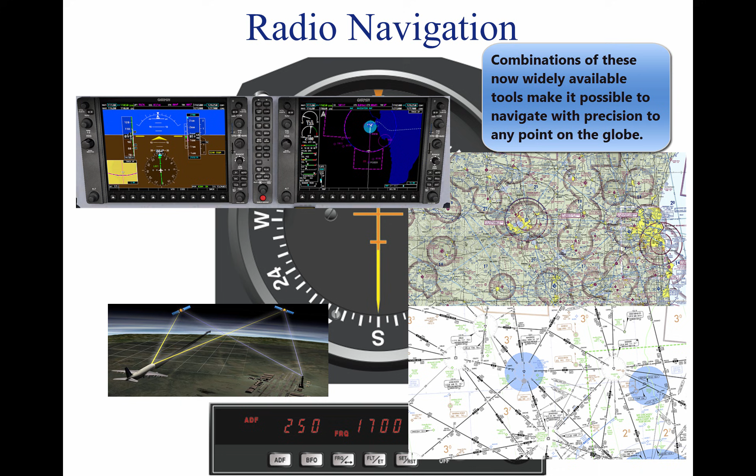Radio navigation. Advances in navigational radio receivers installed in aircraft, the development of aeronautical charts which show the exact location of ground transmitting stations and their frequencies, along with refined flight deck instrumentation, make it possible for pilots to navigate with precision to almost any point desired.

Although precision in navigation is obtainable through the proper use of this equipment, beginning pilots should use this equipment to supplement navigation by visual reference to the ground, pilotage. This method provides the pilot with an effective safeguard against disorientation in the event of radio malfunction.

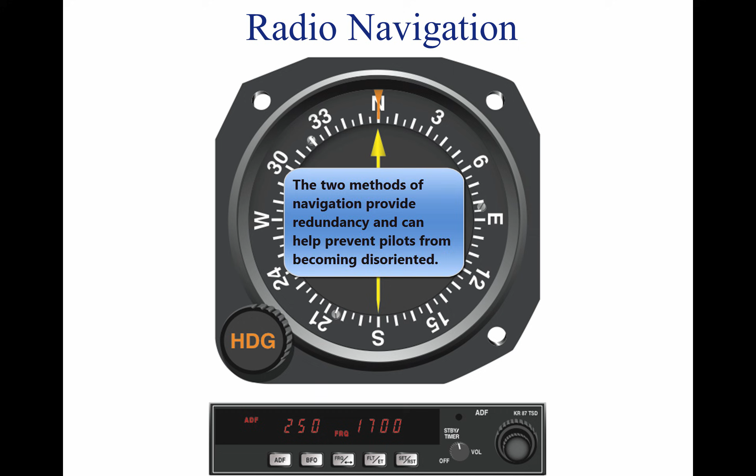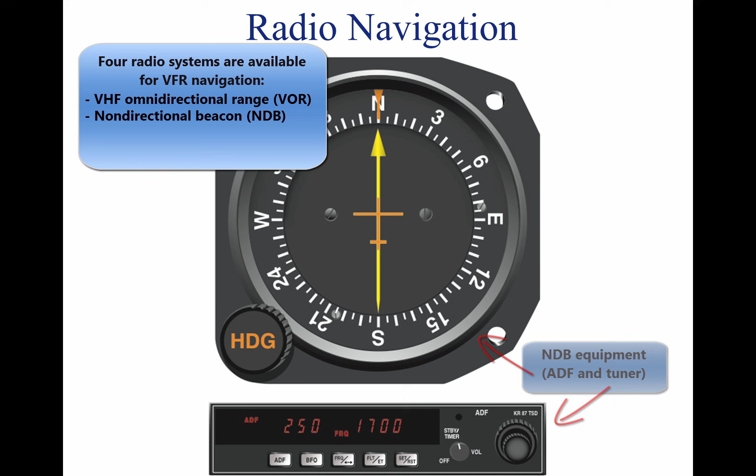There are 4 radio navigation systems available for use for VFR navigation. These are VHF Omnidirectional Range (VOR), Non-Directional Radio Beacon (NDB), Long Range Navigation (LORAN-C), and Global Positioning System (GPS).

Very High Frequency, VHF Omnidirectional Range, VOR. The VOR system is present in 3 slightly different navigation aids, nav aids: VOR, VOR DME, and VORTAC.

By itself, it is known as a VOR, and it provides magnetic bearing information to and from the station. When DME is also installed with a VOR, the nav aid is referred to as a VOR DME. When military tactical air navigation (TACAN) equipment is installed with a VOR, the nav aid is known as a VORTAC. DME is always an integral part of a VORTAC.

Regardless of the type of nav aid utilized, VOR, VOR DME, or VORTAC, the VOR indicator behaves the same. Unless otherwise noted, in this section, VOR, VOR DME, and VORTAC nav aids are all referred to hereafter as VORs.

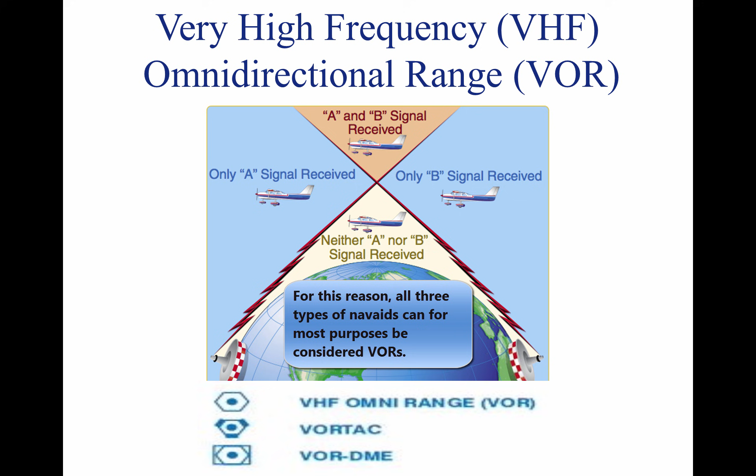The prefix omni means all, and an omnidirectional range is a VHF radio transmitting ground station that projects straight-line courses, or radials, from the station in all directions. From a top view, it can be visualized as being similar to the spokes from the hub of a wheel.

The distance VOR radials are projected depends upon the power output of the transmitter. The course or radials projected from the station are referenced to magnetic north. Therefore, a radial is defined as a line of magnetic bearing extending outward from the VOR station.

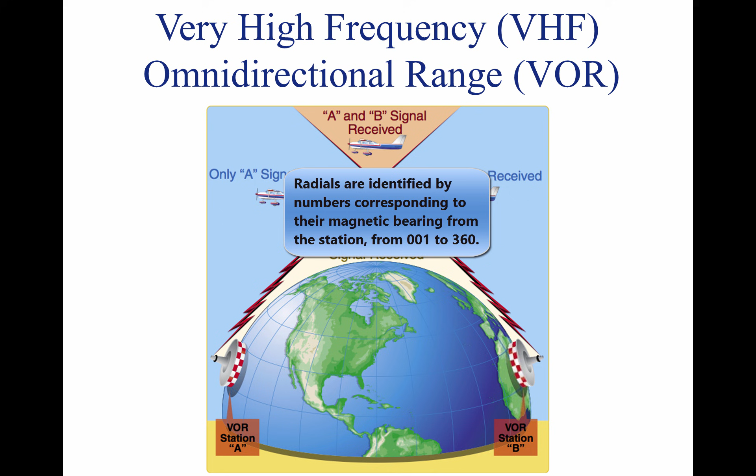Radials are identified by numbers beginning with 001, which is 1 degree east of magnetic north, and progress in sequence through all the degrees of a circle until reaching 360 degrees. To aid in orientation, a compass rose reference to magnetic north is superimposed on aeronautical charts at the station location.

VOR ground stations transmit within a VHF frequency band of 108.0 to 117.95 MHz. Because the equipment is VHF, the signals transmitted are subject to line-of-sight restrictions. Therefore, its range varies in direct proportion to the altitude of receiving equipment.

Generally, the reception range of the signals at an altitude of 1,000 feet above ground level (AGL) is about 40 to 45 miles. This distance increases with altitude.

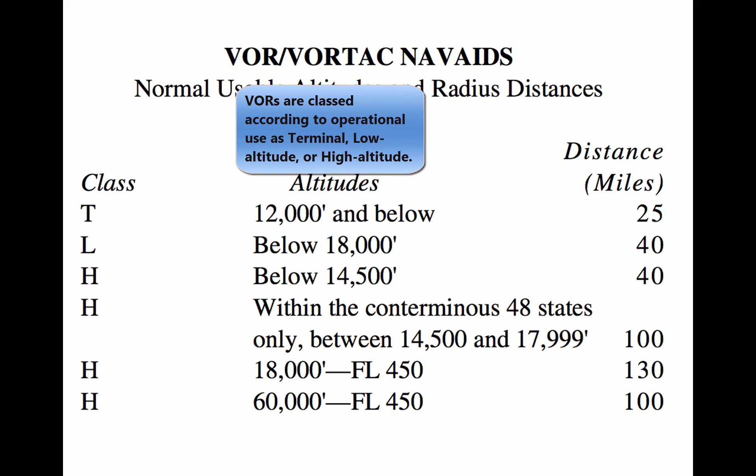VORs and VORTACs are classed according to operational use. There are 3 classes: T, terminal; L, low altitude; and H, high altitude. The normal useful range for the various classes is shown in this table.

The useful range of certain facilities may be less than 50 miles. For further information concerning these restrictions, refer to the Communication Nav Aid remarks in the AFD.

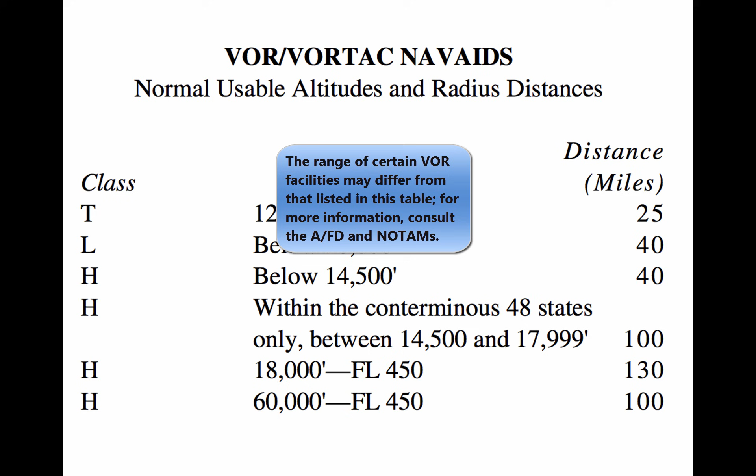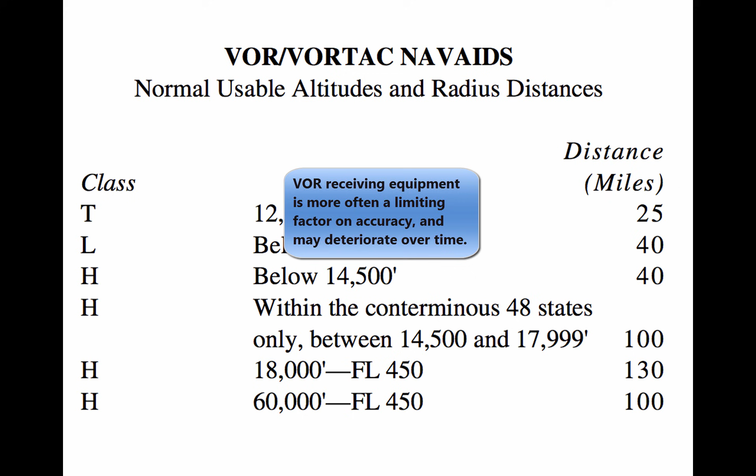The accuracy of course alignment of VOR radials is considered to be excellent. It is generally within plus or minus 1 degree. However, certain parts of the VOR receiver equipment deteriorate, and this affects its accuracy. This is particularly true at great distances from the VOR station.

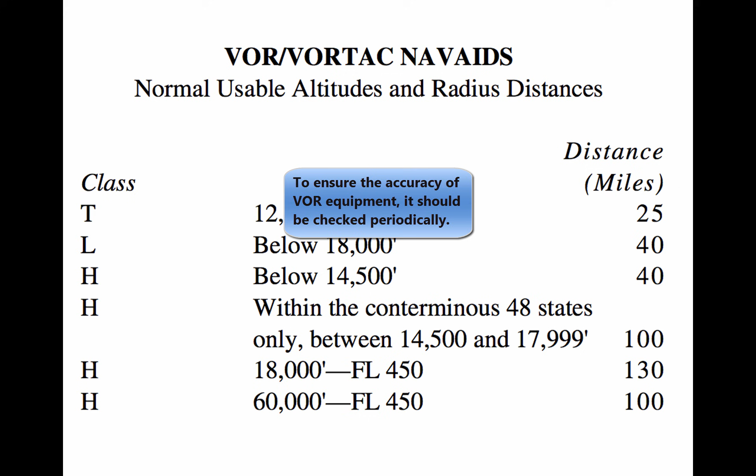The best assurance of maintaining an accurate VOR receiver is periodic checks and calibrations. VOR accuracy checks are not a regulatory requirement for VFR flight. However, to assure accuracy of the equipment, these checks should be accomplished quite frequently and a complete calibration each year.

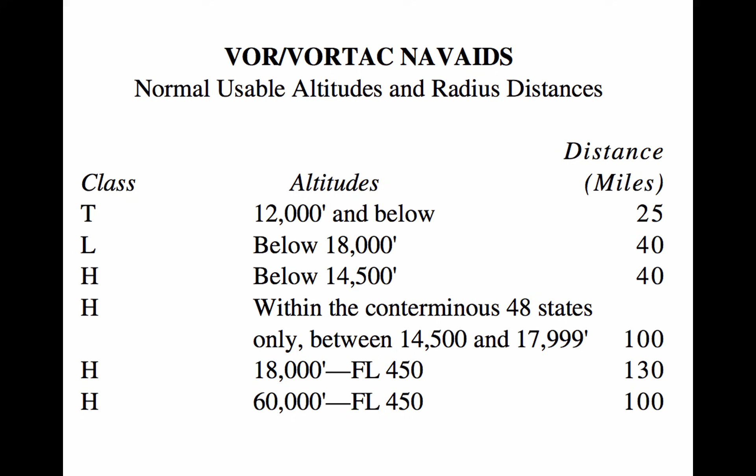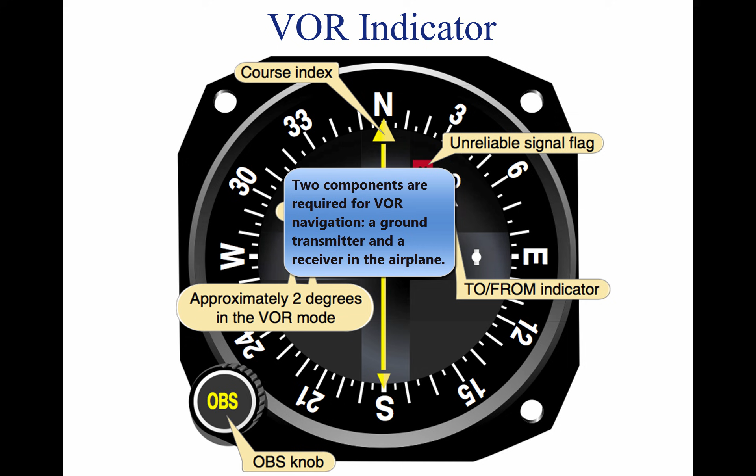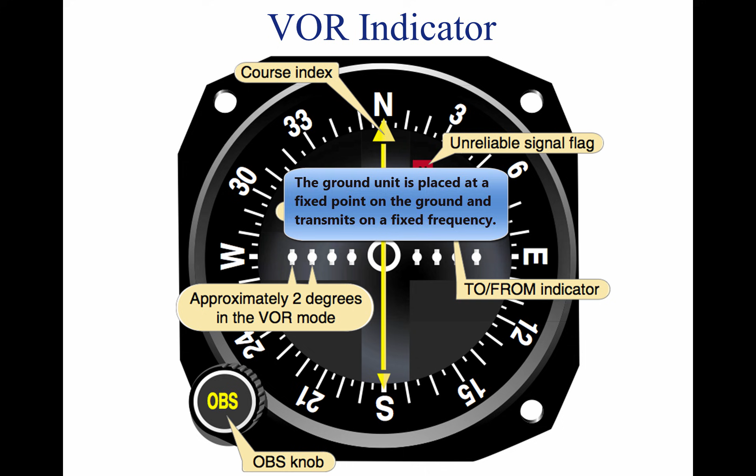Using the VOR. In review, for VOR radio navigation, there are two components required: ground transmitter and aircraft receiving equipment. The ground transmitter is located at a specific position on the ground and transmits on an assigned frequency. The aircraft equipment includes a receiver with a tuning device and a VOR or omni-navigation instrument.

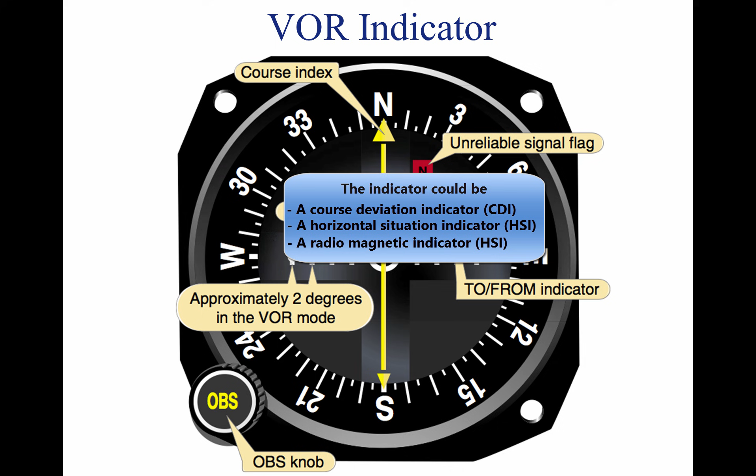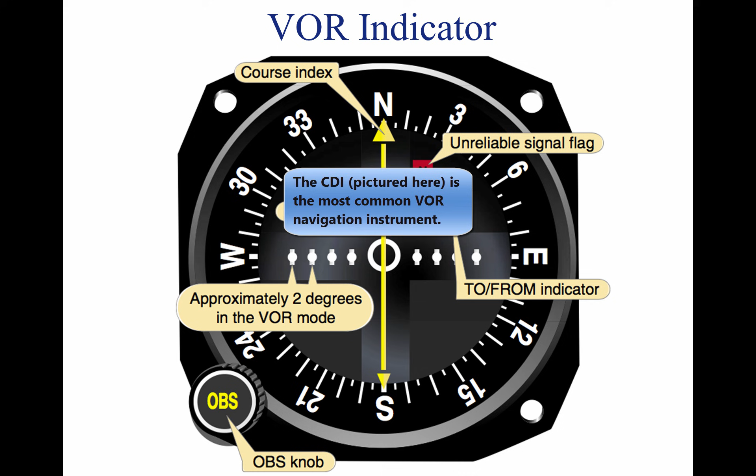The navigation instrument could be a course deviation indicator (CDI), horizontal situation indicator (HSI), or a radiomagnetic indicator (RMI). Each of these instruments indicates the course to the tuned VOR. Course deviation indicator. The CDI is found in most training aircraft. It consists of 1.

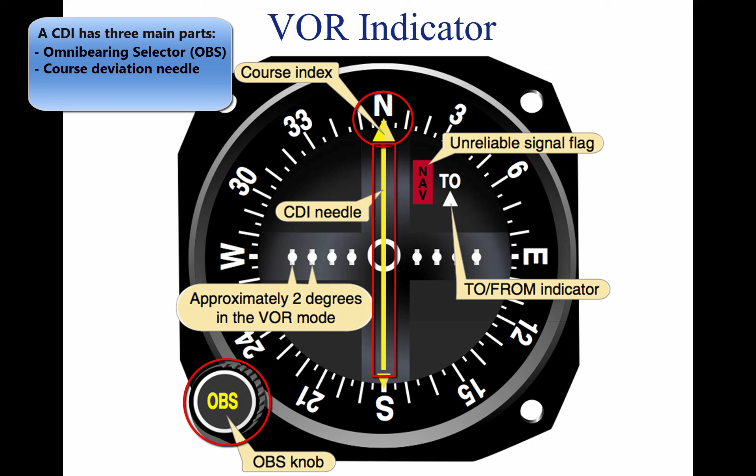Omni-bearing selector, OBS, sometimes referred to as the course selector; a CDI needle, left-right needle; and a to-from indicator. The course selector is an azimuth dial that can be rotated to select a desired radial, or to determine the radial over which the aircraft is flying.

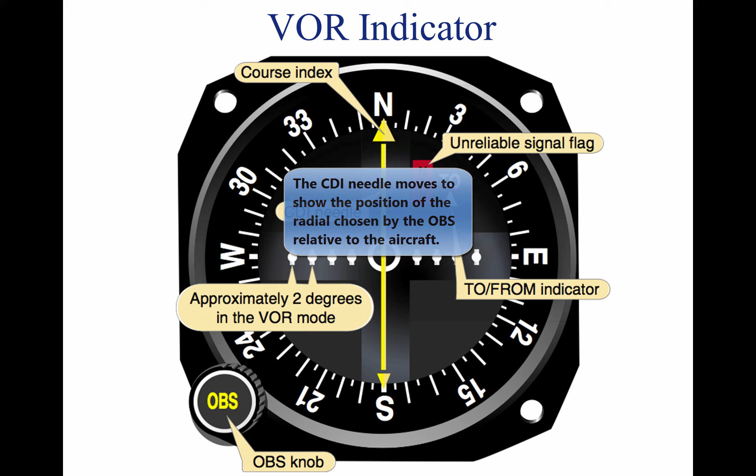In addition, the magnetic course to or from the station can be determined. When the course selector is rotated, it moves the CDI needle to indicate the position of the radial relative to the aircraft. If the course selector is rotated until the deviation needle is centered, the radial, magnetic course from the station, or its reciprocal, magnetic course to the station, can be determined.

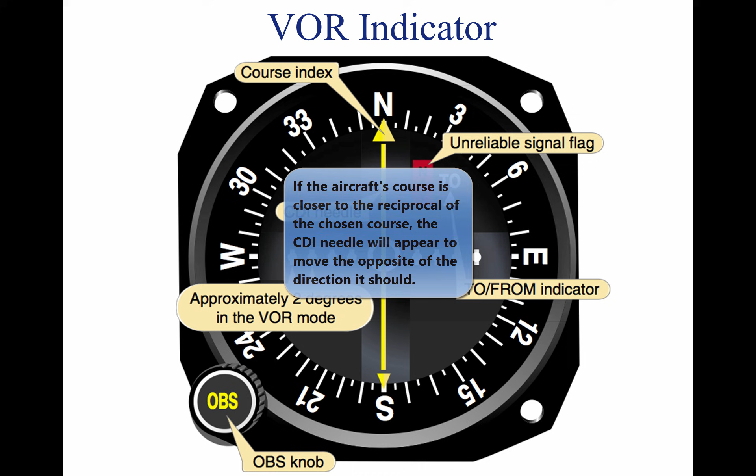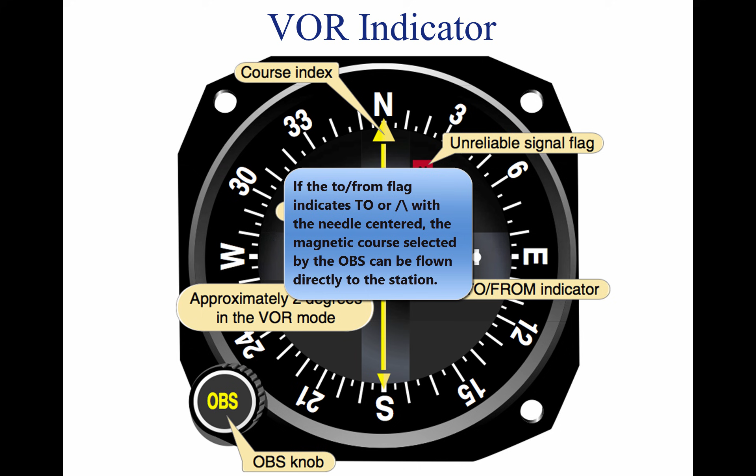The course deviation needle also moves to the right or left if the aircraft is flown or drifting away from the radial set in the course selector. By centering the needle, the course selector indicates either the course from the station or the course to the station. If the flag displays a to, the course shown must be flown to the station. If from is displayed and the course shown is followed, the aircraft is flown away from the station.

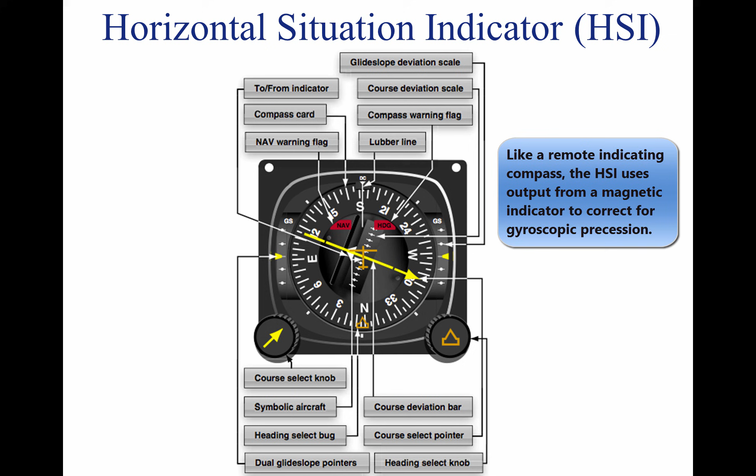Horizontal situation indicator. The HSI is a direction indicator that uses the output from a flux valve to drive the compass card. The HSI combines the magnetic compass with navigational signals and a glide slope. The HSI gives the pilot an indication of the location of the aircraft with relationship to the chosen course or radial. In this figure, the aircraft magnetic heading displayed on the compass card under the lubber line is 184 degrees.

The course select pointer shown is set to 295 degrees. The tail of the pointer indicates the reciprocal, 115 degrees. The course deviation bar operates with a VOR, localizer, or GPS navigation receiver to indicate left or right deviations from the course selected with the course select pointer.

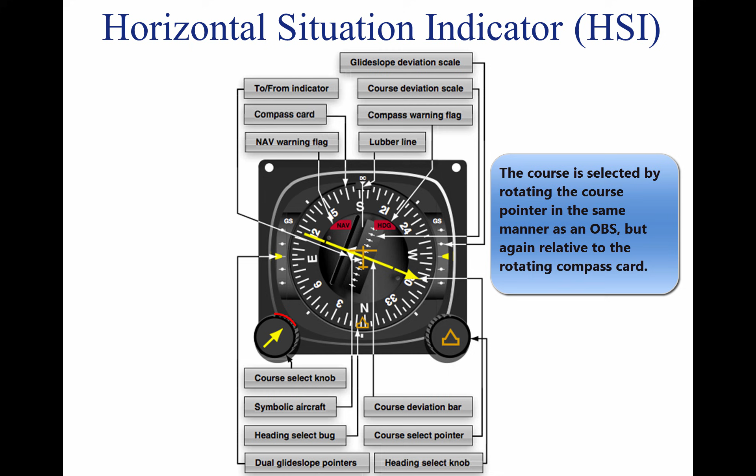Operating in the same manner, the angular movement of a conventional VOR/LOC needle indicates deviation from course. The desired course is selected by rotating the course select pointer in relation to the compass card by means of the course select knob. The HSI has a fixed aircraft symbol, and the course deviation bar displays the aircraft's position relative to the selected course.

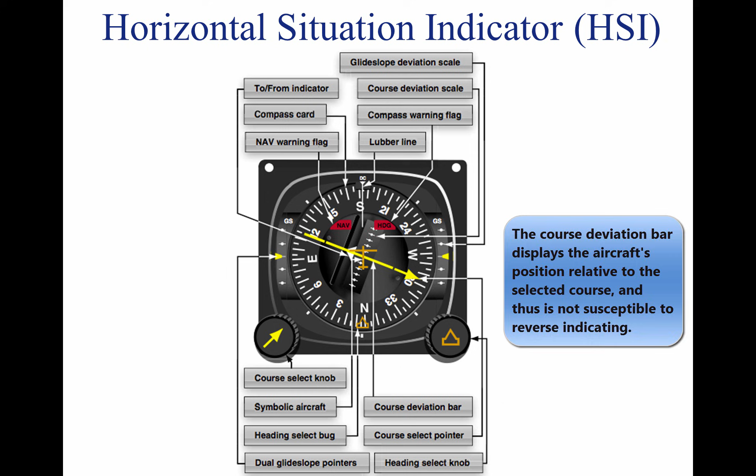The to-from indicator is a triangular pointer. When the indicator points to the head of the course select pointer, the arrow shows the course selected; if properly intercepted and flown, the course will take the aircraft to the chosen facility. When the indicator points to the tail of the course, the arrow shows that the course selected, if properly intercepted and flown, will take the aircraft directly away from the chosen facility.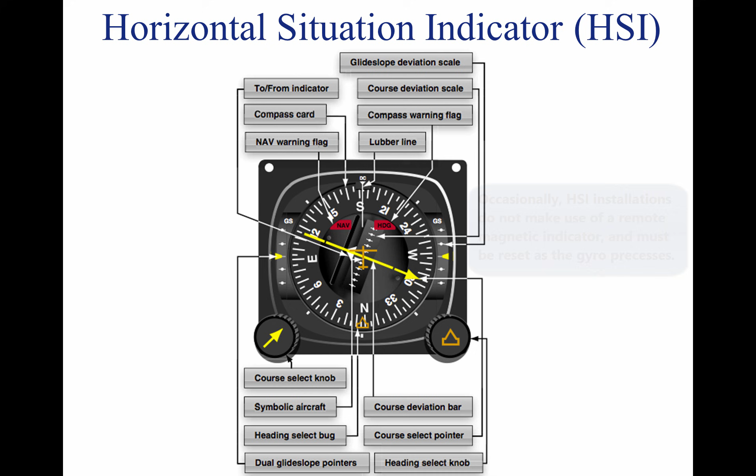When the nav warning flag appears, it indicates no reliable signal is being received. The appearance of the heading flag indicates the compass card is not functioning properly. The glide slope pointer indicates the relation of the aircraft to the glide slope. When the pointer is below the center position, the aircraft is above the glide slope, and an increased rate of descent is required. In some installations, the azimuth card is a remote indicating compass; however, in others, the heading must be checked occasionally against the magnetic compass and reset.

The RMI is a navigational aid providing aircraft magnetic or directional gyro heading and VOR, GPS, and automatic direction finder (ADF) bearing information. Remote indicating compasses were developed to compensate for errors in and limitations of older types of heading indicators. The remote compass transmitter is a separate unit, usually mounted in a wingtip, to eliminate the possibility of magnetic interference. The RMI consists of a compass card, a heading index, two bearing pointers, and pointer function switches.

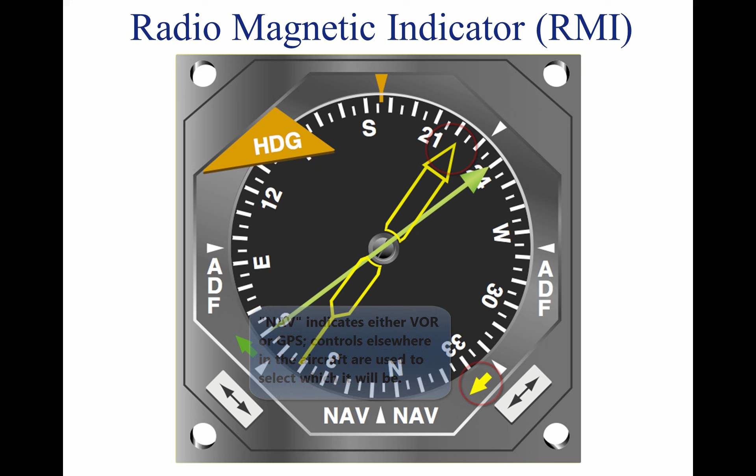The two pointers are driven by any two combinations of a GPS, an ADF, and/or a VOR. The pilot has the ability to select the navigation aid to be indicated. The pointer indicates course to the selected nav aid or waypoint. In this figure, the green pointer is indicating the station tuned on the ADF, and the yellow pointer is indicating the course to a VOR or GPS waypoint. Note that there is no requirement for a pilot to select course with the RMI, but only the nav aid to be indicated.

Tracking with VOR. The following describes a step-by-step procedure to use when tracking to and from a VOR station using a CDI. This figure illustrates the procedure.

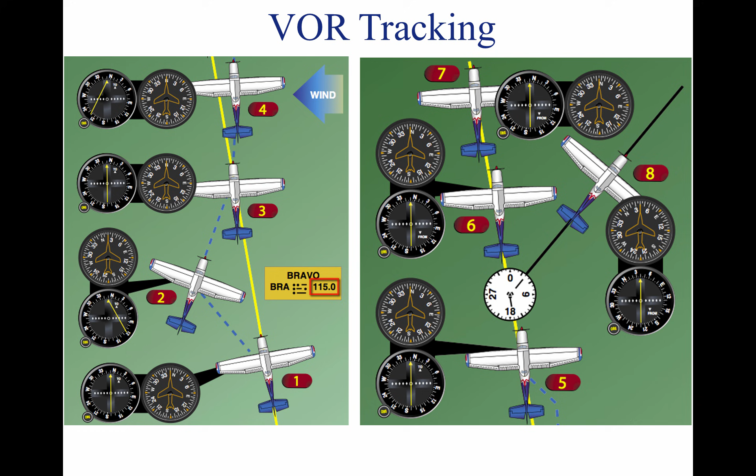First, tune the VOR receiver to the frequency of the selected VOR station, for example 115.0 to receive Bravo VOR. Next, check the identifiers to verify that the desired VOR is being received.

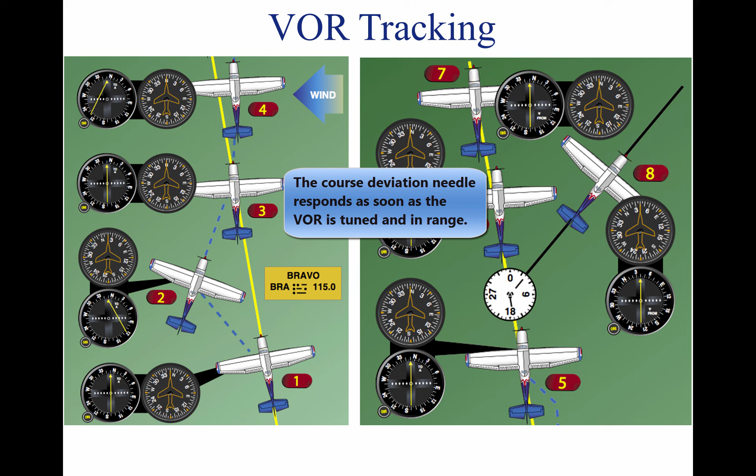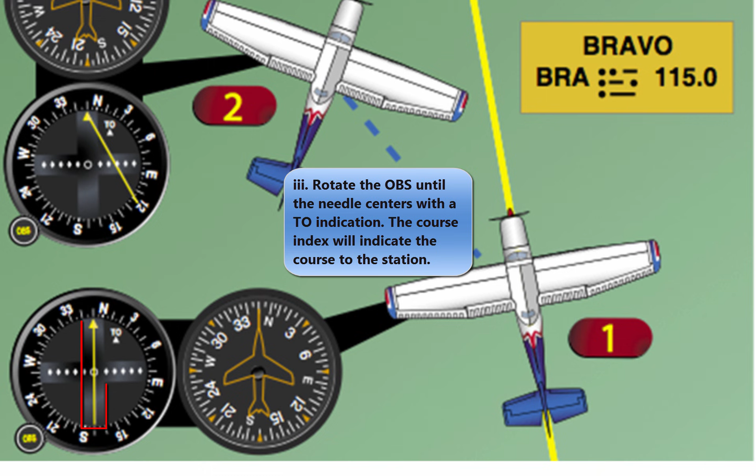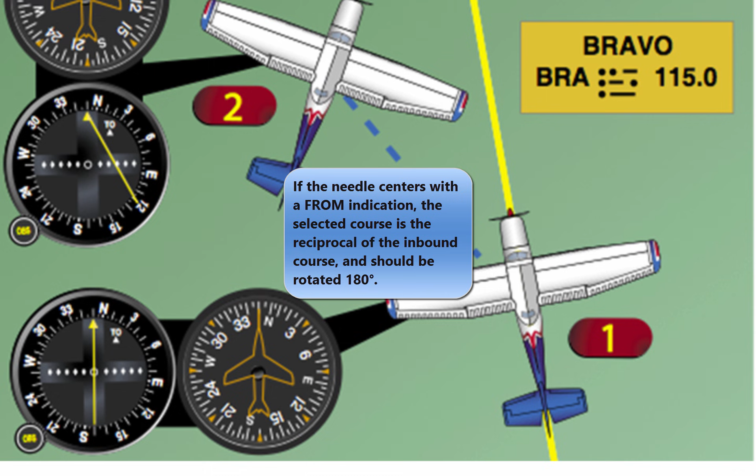As soon as the VOR is properly tuned, the course deviation needle deflects either left or right. Then rotate the azimuth dial to the course selector until the course deviation needle centers and the to-from indicator indicates to. If the needle centers with a from indication, the azimuth should be rotated 180 degrees, because in this case it is desired to fly to the station.

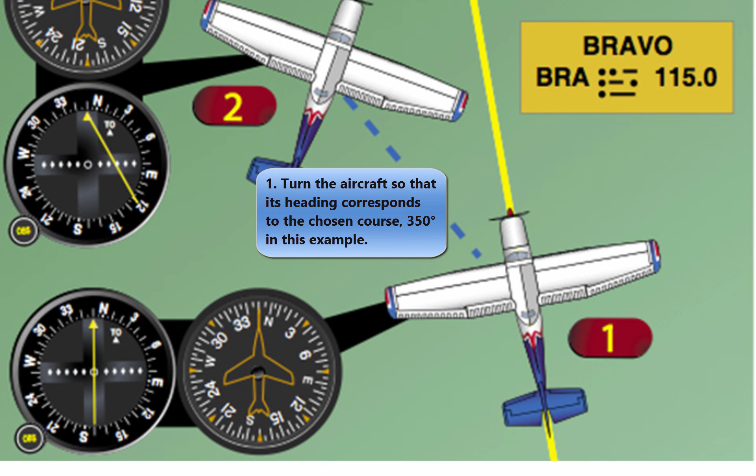Now turn the aircraft to the heading indicated on the VOR azimuth dial or course selector, 350 degrees in this example. If a heading of 350 degrees is maintained, with a wind from the right as shown, the aircraft drifts to the left of the intended track.

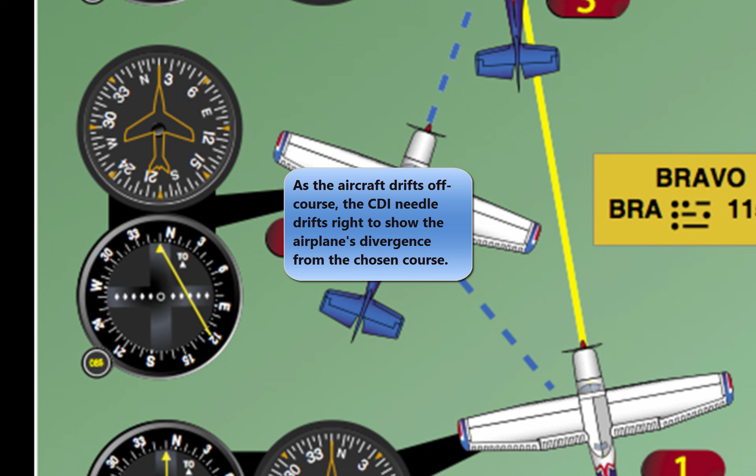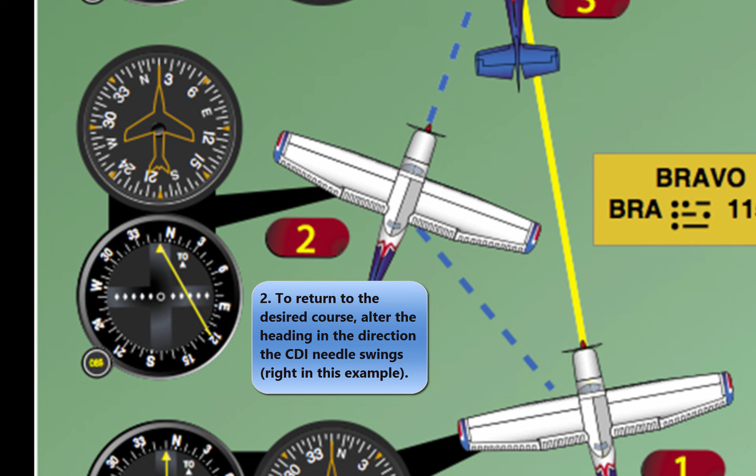As the aircraft drifts off course, the VOR course deviation needle gradually moves to the right of center, indicating the direction of the desired radial or track. To return to the desired radial, the aircraft heading must be altered to the right. As the aircraft returns to the desired track, the deviation needle slowly returns to center.

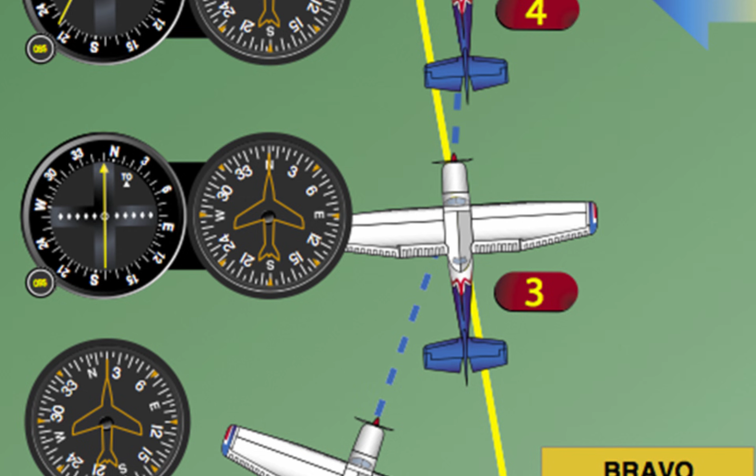When centered, the aircraft is on the desired radial, and a left turn must be made toward, but not to, the original heading of 350 degrees, because a wind drift correction must be established. The amount of correction depends upon the strength of the wind. If the wind velocity is unknown, a trial and error method can be used to find the correct heading.

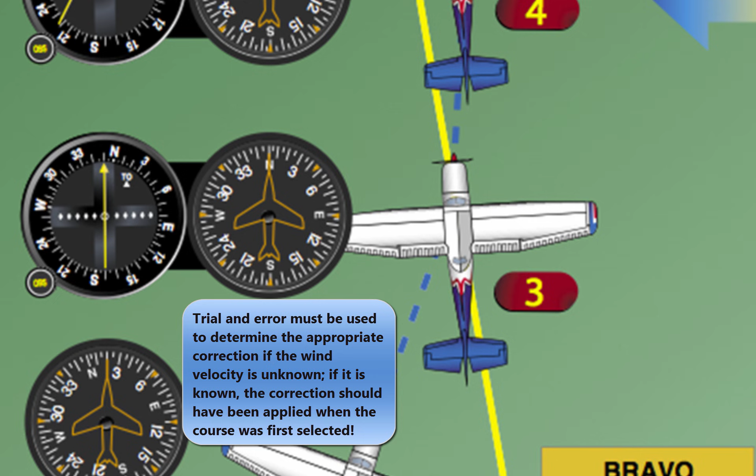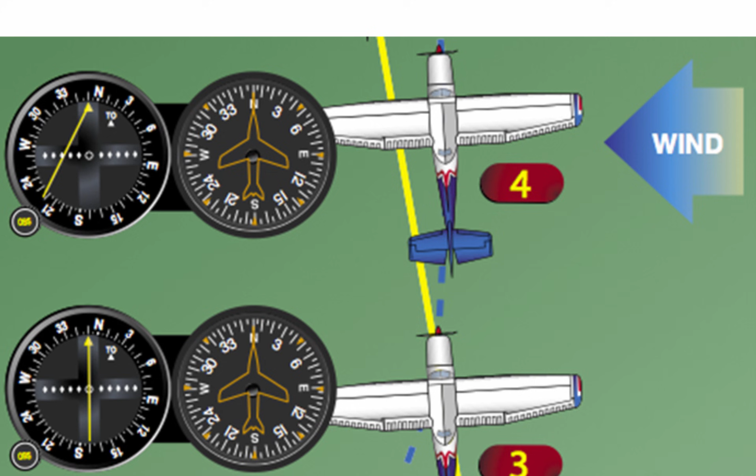Assume for this example a 10-degree correction for a heading of 360 degrees is maintained. While maintaining a heading of 360 degrees, assume that the course deviation begins to move to the left. This means that the wind correction of 10 degrees is too great, and the aircraft is flying to the right of course. A slight turn to the left should be made to permit the aircraft to return to the desired radial.

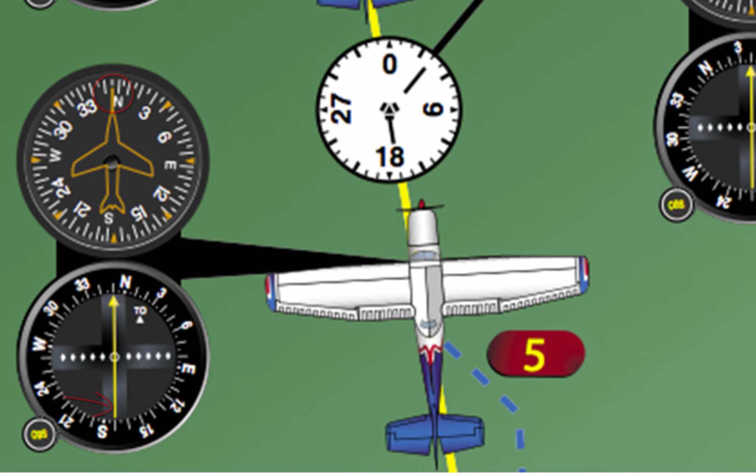When the deviation needle centers, a small wind drift correction of 5 degrees, or a heading of 355 degrees, should be flown. If this correction is adequate, the aircraft remains on the radial. If not, small variations in heading should be made to keep the needle centered and keep the aircraft on the radial.

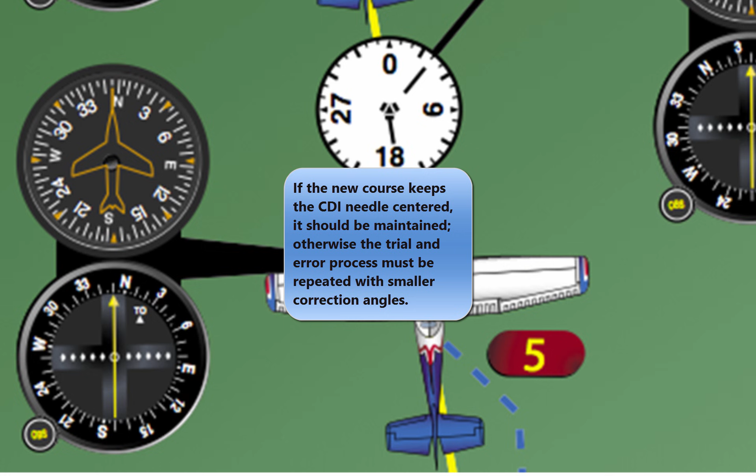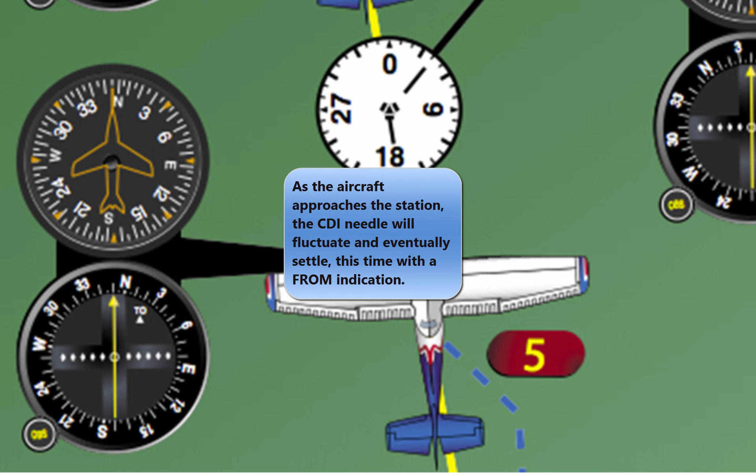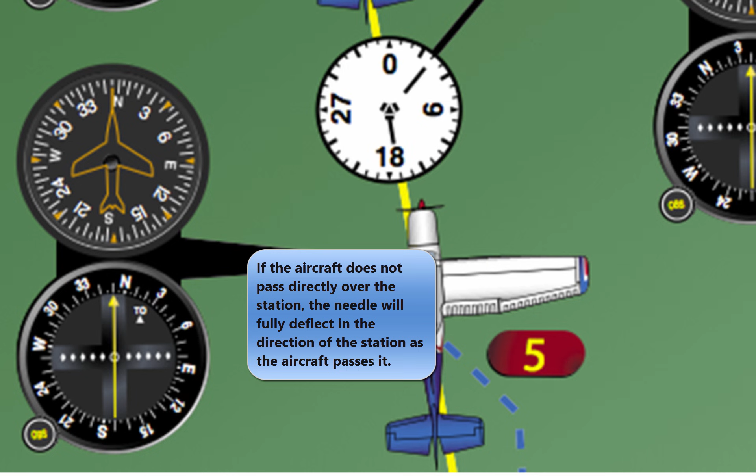As the VOR station is passed, the course deviation needle fluctuates, then settles down, and the to indication changes to from. If the aircraft passes to one side of the station, the needle deflects in the direction of the station as the indicator changes to from.

Generally, the same techniques apply when tracking outbound as those used for tracking inbound. If the intent is to fly over the station and track outbound on the reciprocal of the inbound radial, the course selector should not be changed. Corrections are made in the same manner to keep the needle centered. The only difference is that the TO/FROM indicator indicates from.

If tracking outbound on a course other than the reciprocal of the inbound radial, this new course or radial must be set in the course selector and a turn made to intercept this course. After this course is reached, tracking procedures are the same as previously discussed.

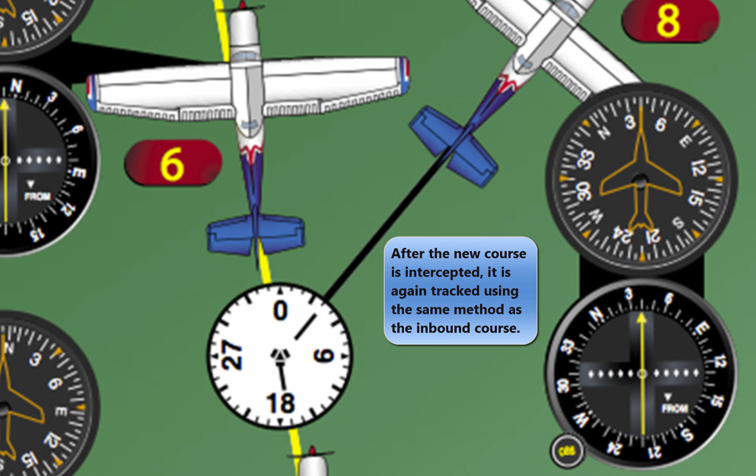Tips on using the VOR. Positively identify the station by its code or voice identification. Keep in mind that VOR signals are line of sight. A weak signal or no signal at all is received if the aircraft is too low or too far from the station.

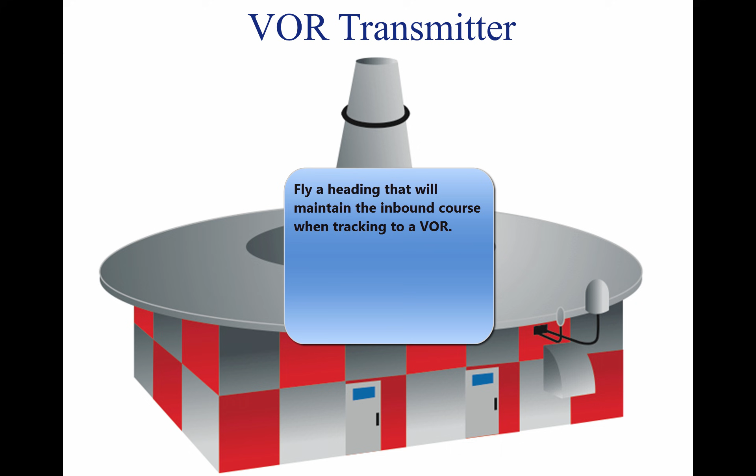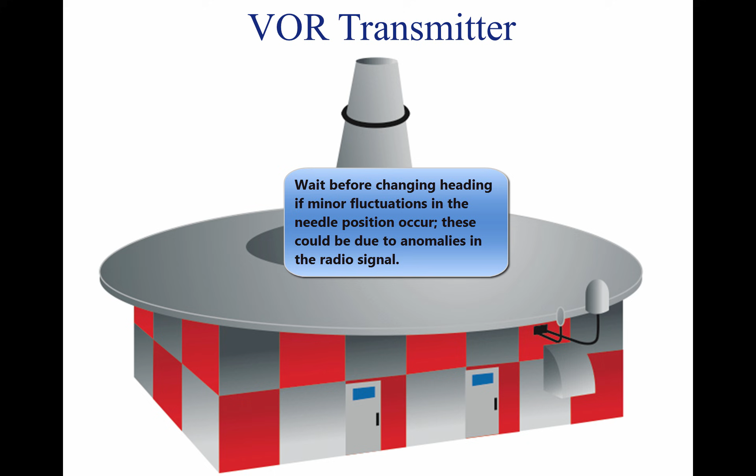When navigating to a station, determine the inbound radial and use this radial. Fly a heading that will maintain the course. If the aircraft drifts, fly a heading to re-intercept the course, then apply a correction to compensate for wind drift. If minor needle fluctuations occur, avoid changing headings immediately. Wait momentarily to see if the needle recenters. If it does not, then correct.

When flying to a station, always fly the selected course with a to indication. When flying from a station, always fly the selected course with a from indication.

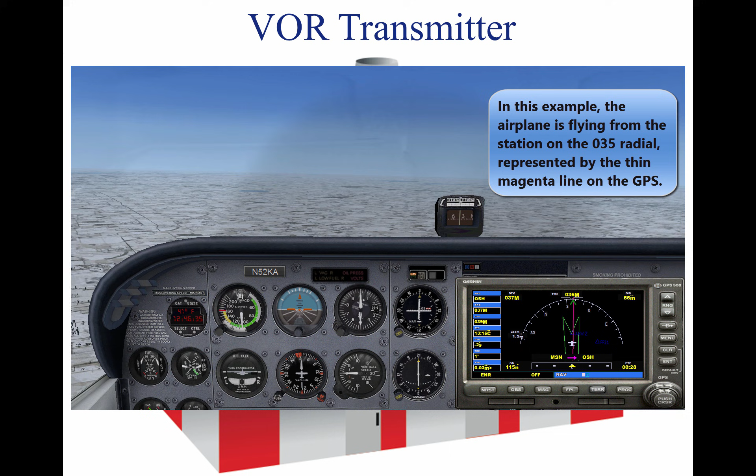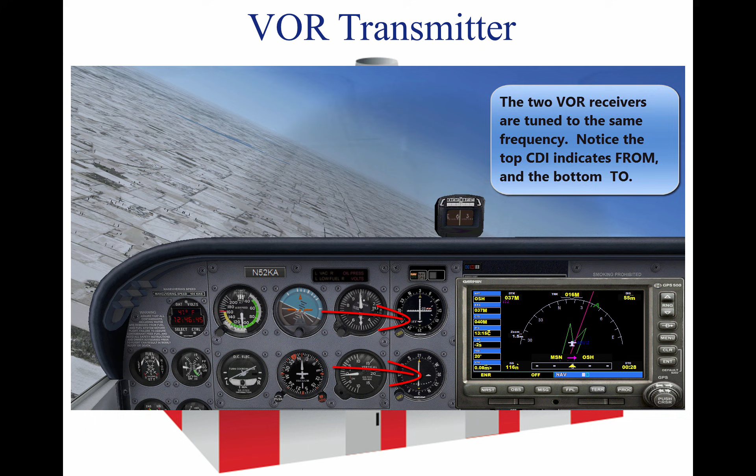If this is not done, the action of the course deviation needle is reversed. To further explain this reverse action, if the aircraft is flown toward the station with a FROM indication, or away from the station with a TO indication, the course deviation needle indicates in a direction opposite to that which it should indicate. For example, if the aircraft drifts to the right of a radial being flown, the needle moves to the right, or points away from the radial. If the aircraft drifts to the left of the radial being flown, the needle moves left, or in the direction opposite to the radial.

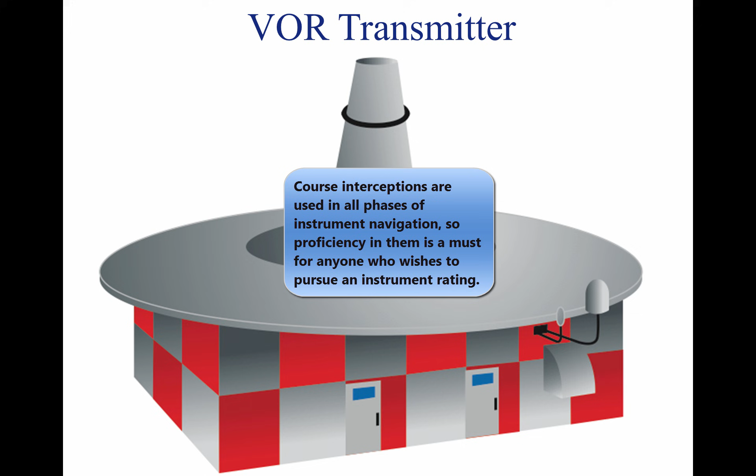When navigating using the VOR, it is important to fly headings that maintain or re-intercept the course. Just turning toward the needle will cause overshooting the radial and flying an S-turn to the left and right of course. Course intercepts are performed in most phases of instrument navigation. The equipment used varies, but an intercept heading must be flown that results in an angle or rate of intercept sufficient to solve a particular problem.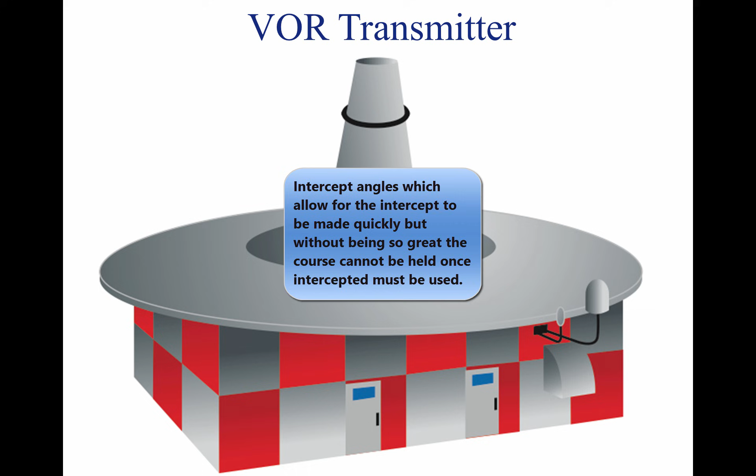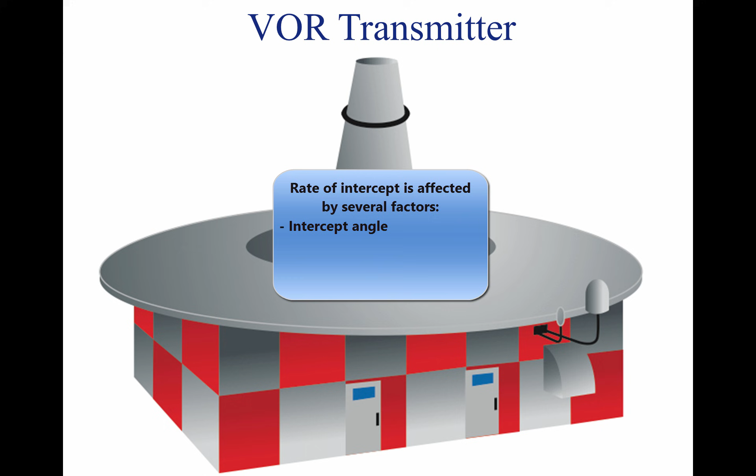Rate of intercept, seen by the aviator as bearing pointer or HSI movement, is a result of the following factors: the angle at which the aircraft is flown toward a desired course, angle of intercept, true airspeed and wind, and distance from the station.

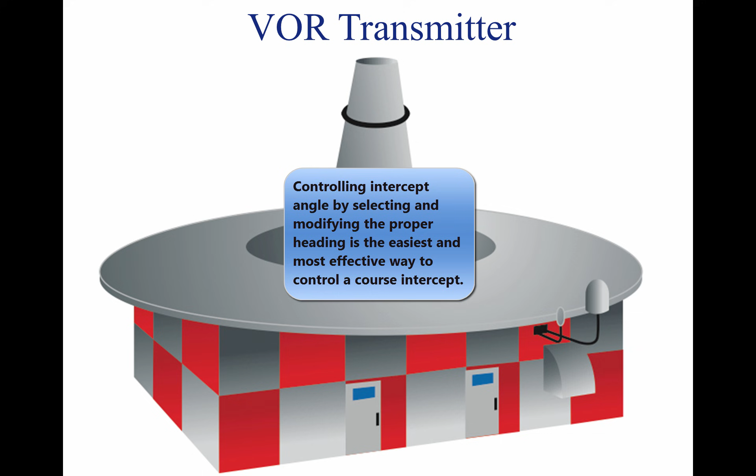The angle of intercept is the angle between the heading of the aircraft, intercept heading, and desired course. Controlling this angle by selection or adjustment of the intercept heading is the easiest and most effective way to control course interceptions. Angle of intercept must be greater than the degrees from course, but should not exceed 90 degrees. Within this limit, adjust to achieve the most desirable rate of intercept.

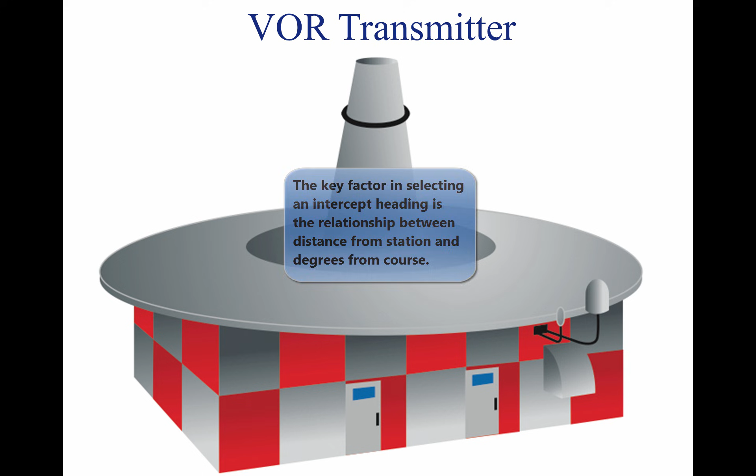When selecting an intercept heading, the key factor is the relationship between distance from the station and degrees from the course. Each degree of radial is 1 nautical mile wide at a distance of 60 nautical miles from the station. Width increases or decreases in proportion to the 60 nautical mile distance. For example, 1 degree is 2 nautical miles wide at 120 nautical miles, and 1/2 nautical mile wide at 30 nautical miles.

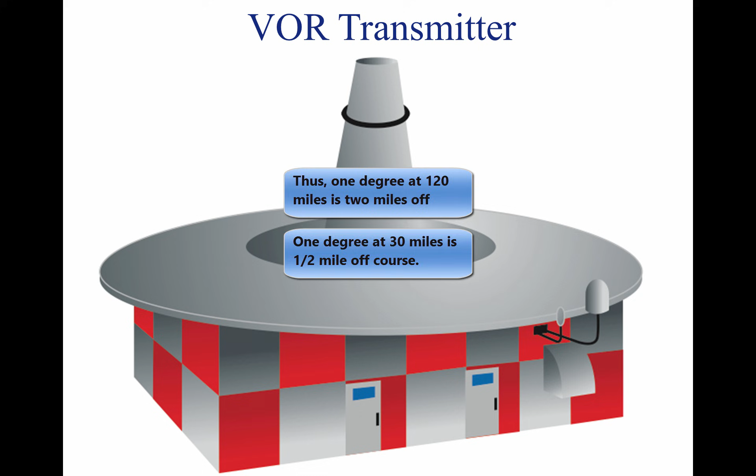For a given ground speed and angle of intercept, the resultant rate of intercept varies according to the distance from the station. When selecting an intercept heading to form an angle of intercept, consider the following factors: degrees from course, distance from the station, and true airspeed and wind.

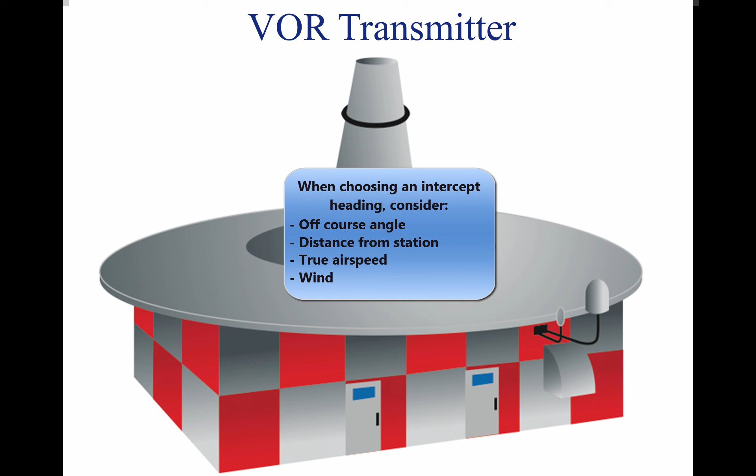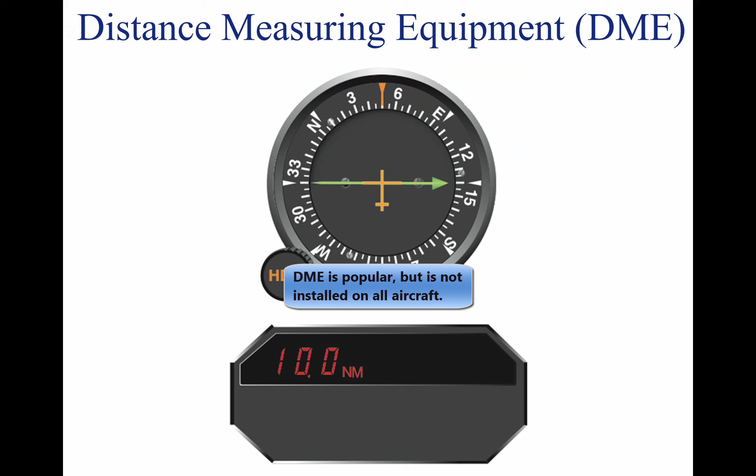Distance measuring equipment, DME, consists of an ultra-high-frequency navigational aid with VOR DMEs and VORTACs. It measures in nautical miles the slant range distance of an aircraft from a VOR DME or VORTAC, both hereafter referred to as a VORTAC. Although DME equipment is very popular, not all aircraft are DME equipped. To utilize DME, the pilot should select, tune, and identify a VORTAC as previously described.

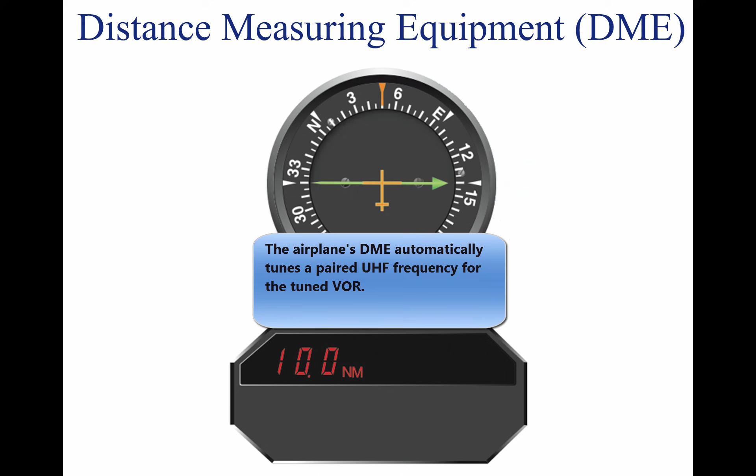The DME receiver, utilizing what is called a paired frequency concept, automatically selects and tunes the UHF DME frequency associated with the VHF VORTAC frequency selected by the pilot. This process is entirely transparent to the pilot. After a brief pause, the DME display shows the slant range distance to or from the VORTAC. Slant range distance is the direct distance between the aircraft and the VORTAC, and is therefore affected by aircraft altitude.

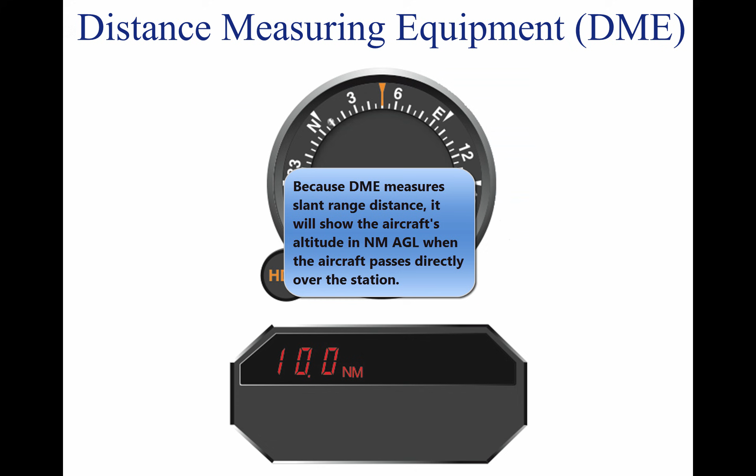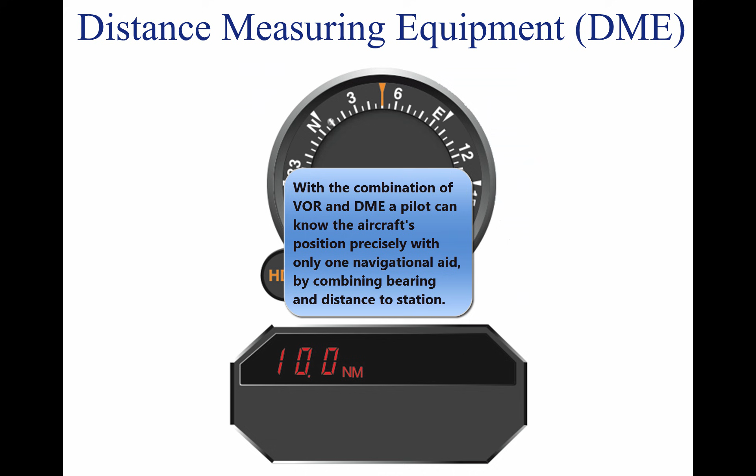Station passage directly over a VORTAC from an altitude of 6,076 feet above ground level, AGL, would show approximately 1.0 nautical miles on the DME. DME is a very useful adjunct to VOR navigation. A VOR radial alone merely gives line of position information. With DME, a pilot may precisely locate the aircraft on that line or radial.

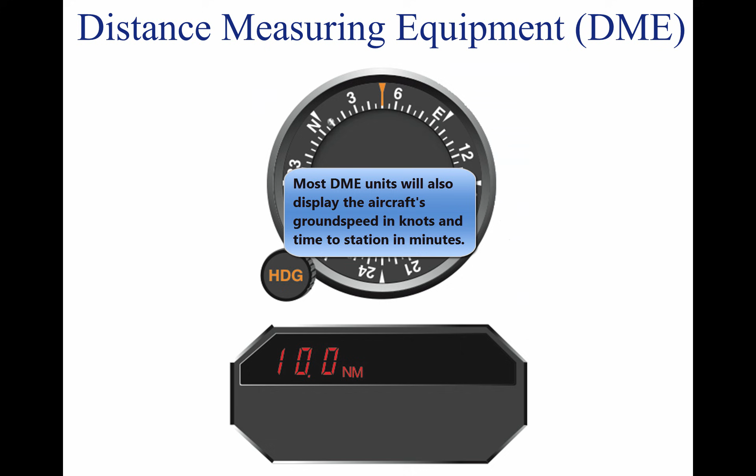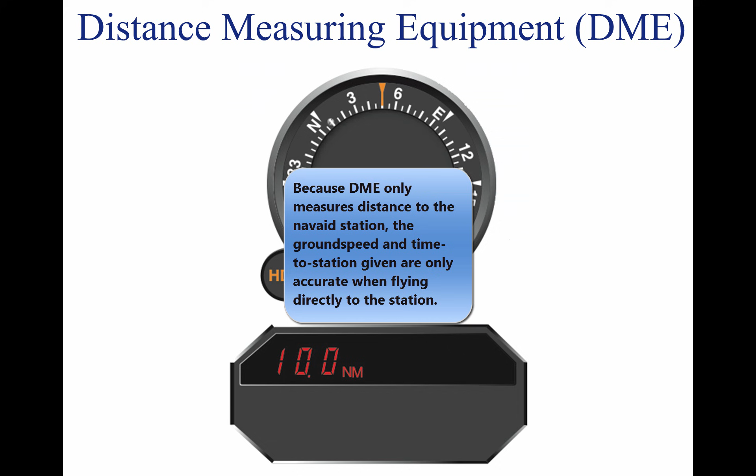Most DME receivers also provide ground speed and time to station modes of operation. The ground speed is displayed in knots, nautical miles per hour. The time to station mode displays the minutes remaining to VORTAC station passage, predicated upon the present ground speed. Ground speed and time to station information is only accurate when tracking directly to or from a VORTAC. DME receivers typically need a minute or two of stabilized flight directly to or from a VORTAC before displaying accurate ground speed or time to station information.